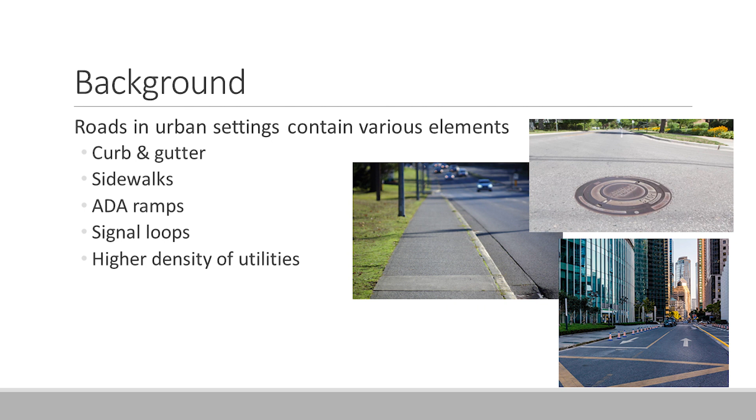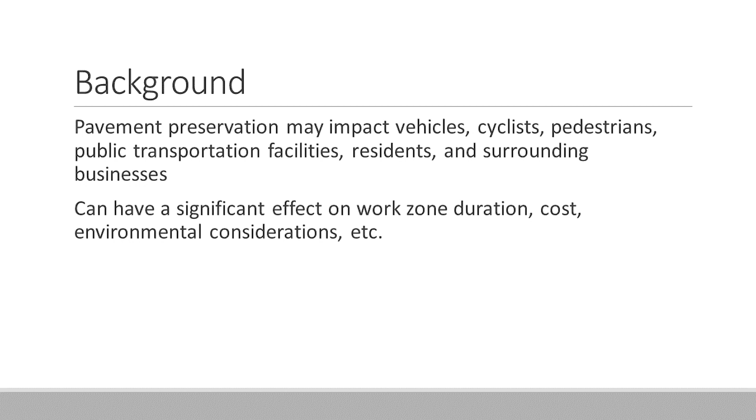These different elements may impact not only the vehicles driving on that road, but also cyclists or pedestrians. We could have public transportation facilities, residents, businesses—all of those could have a significant effect on how long it takes to complete the project, the cost, and environmental considerations.

So the objective of this project was to consolidate and document the latest information on pavement preservation in an urban environment for both rigid and flexible pavements.

We're doing this right now, as Jason said, it's ongoing, but we're achieving it through literature and practice review, identifying factors and their impact level, doing case studies, and compiling all the documents that go along with this project, and also developing webinars on the subject.

The treatments we're considering under this include chip seals, slurry treatments—so slurry seals, microsurfacing, cape seals—crack sealing and filling, thin asphalt overlays, recycle-based techniques as well, and also for rigid pavements, patching, diamond grinding, that sort of thing.

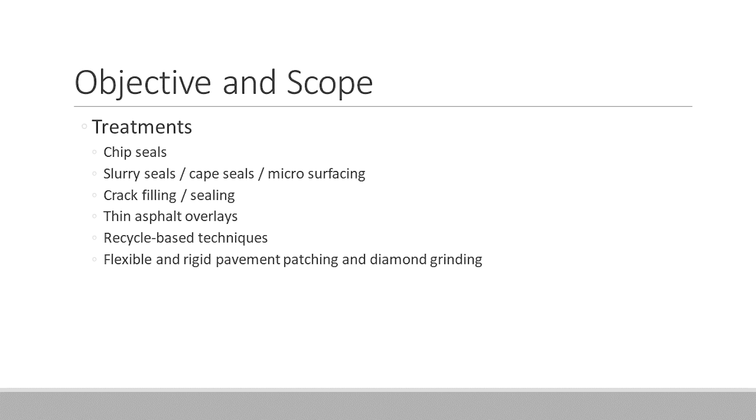Our research team is being led by ARA, Applied Research Associates. Sri Rao is the project manager. We have Letha as the technical editor, and Lisa is taking care of us being 508 compliant with the deliverables. On the NCAT side, I'm the PI, and we also have Travis Wolbeck as a subject matter expert.

We also have the Transtech group. Kiran Mohan-Rush is another subject matter expert, and we also have California State University at Chico, with Ding also participating as an expert there. So the nice thing is we have a team that is active throughout the country, from coast to coast, basically.

So each of us can reach out to different people within our areas and get better information with this.

Starting with the literature and practice review, as expected, a lot of this information is not published. There may be a quick reference here and there in some report, but something specifically for urban environments is really very limited in the type of information we could find.

So we're relying heavily on interactions with owner agencies, with contractors, practitioners—basically talking to people and seeing what their experiences are. We've been reaching out to different stakeholders, talking to different members of the pavement preservation partnerships.

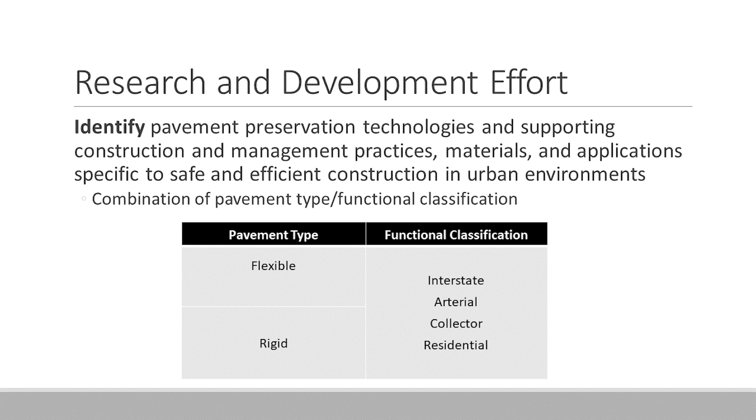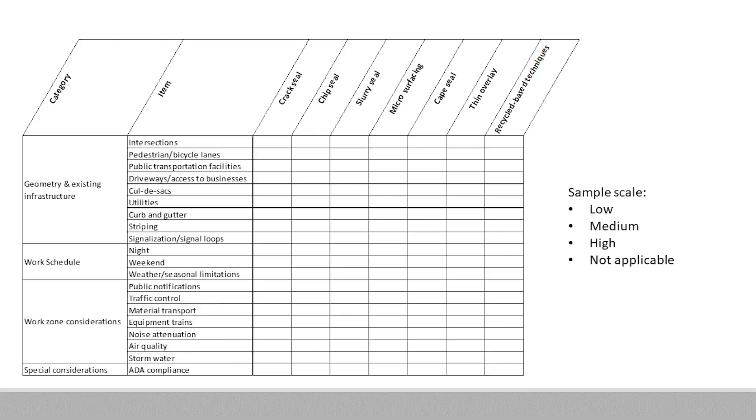Our goal is to have a table like this, with the different items or potential issues, and all the treatments for a given surface type and functional classification. We can color-code it or put a scale for whether the impact of a specific issue is low or high, or doesn't apply at all. That's a quick reference for anyone who wants to look into it. Later in the document, you can see why it's classified that way, and what can be done to minimize or mitigate that.

We're also doing case studies—the field visits could be the case study, but we're proposing 6 of those, so we'll need additional projects that have already been completed. We expect significant overlap in some of the things we want to see. We want to include at least a project with rigid pavement, one in an urban major highway or interstate, one with a complete streets environment, and it could be that one project covers multiple of these. We want to touch on the different regions of the pavement preservation partnerships and different climate zones, and one project with removal and application of pavement marking. It could be that one case study touches on several of these.

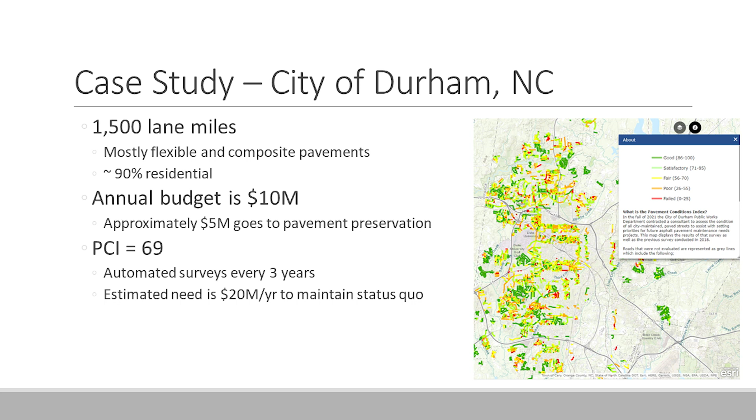To give you a preview of what we saw during our visit to Durham: that city has approximately 1,500 lane miles, mostly flexible and composite pavements, and it's heavily residential, about 90%. Their annual budget is $10 million, and half of that goes to pavement preservation. Their PCI is 69, and they do automated surveys every 3 years. Even with that money, it's only half of what they'd need to keep the current state of their roadways, so they have to be very strategic and smart about what they do.

The treatments they use include crack seal, rejuvenator seals, microsurfacing, and cape seals. They're looking to do their first hot-in-place recycling project but haven't done it yet. They're open to innovations but want to take it slow and make sure they're successful, so they don't end up with something that doesn't work well and gets banned forever.

Some of the interesting policies that they have: they do use crack seal, but they don't leave it exposed. They always do it in combination with other treatments, purely for aesthetics. So they always do crack seal, but cover it with something else.

They work on entire neighborhoods at a time, and I think that's to avoid conflict. So nobody's going to say my street got something and the other street got something different, or my street didn't get a treatment and the next street did. So even if the pavement management system doesn't call for the same thing on the same year, they bundle it all, which I think is smart and cost-effective.

They said before they set up their organization the way it is now, they would just go with what the system said. So it could be that one street needs a micro-surface treatment and the next one a thin overlay, and they would just do it that way—and then they'd never hear the end of it from all the residents.

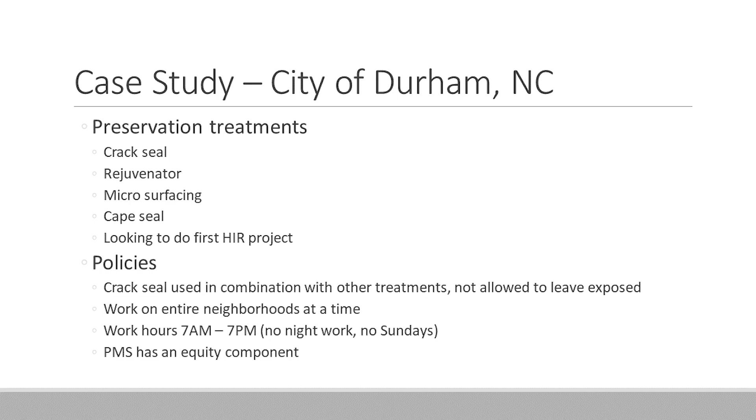Their work hours are 7 to 7. They don't do night work, and they don't do Sundays. Another interesting thing is that their pavement management system has an equity component to it, which I thought was interesting.

They do a very good job with public notifications, which is crucial for the success of their program. The city and the contractor work together to inform users of all the work being done. Because they're so residential, they have to communicate a lot with the HOA.

They start holding meetings with the HOA weeks in advance. They send out notifications by mail and door hangers, and they have a web page. They put the link on the communications they send out, so you can visit and see live what is being done at a certain time. They educate the public and elected officials—they really do a good job with their public outreach.

When we were there, we got to see some of the microsurfacing work being done. Because it's so residential, there were many cul-de-sacs on the streets, which means a lot of handwork has to be done, and that could complicate things a bit or give you a slower production rate.

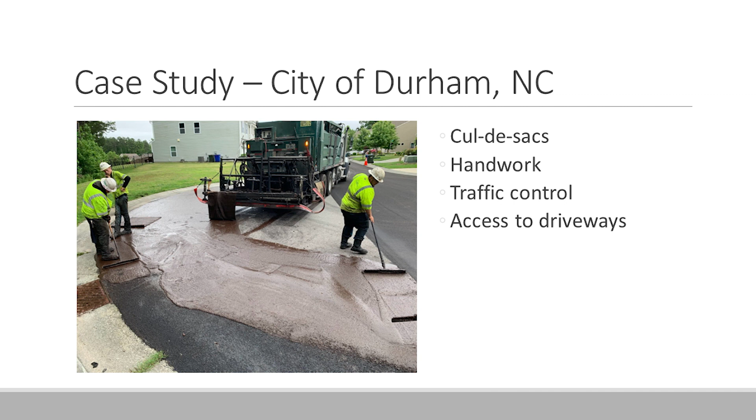Traffic control is also complicated when they're working on these neighborhoods with multiple streets being done at the same time, so they just put up cones and move on—you can't have a flagger on every street. We'll see that in a few slides. Just giving access to driveways and things like that could be a little more complicated.

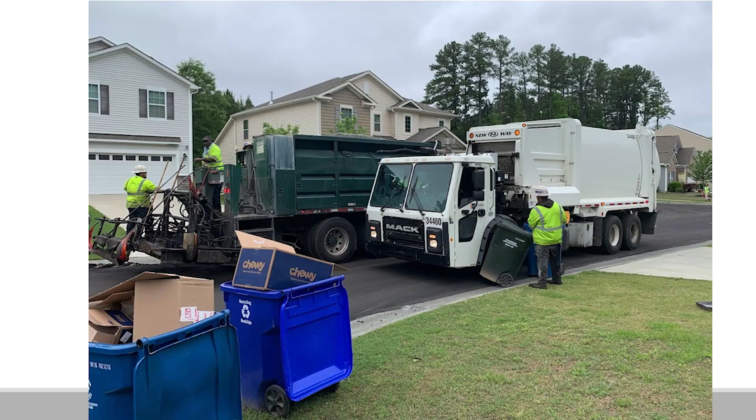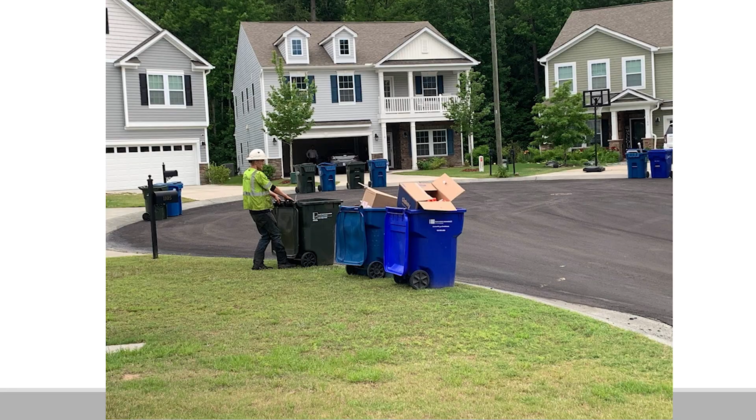Of course, the day we visited it had rained, so they had to postpone. We went to the job site the next day, and it turned out to be garbage pickup day. So a lot of things were happening at the same time, everybody trying to stay out of everybody else's way. I'm sure that was a nightmare for the contractor, but it couldn't have worked better for us—we could actually see all these types of challenges happening.

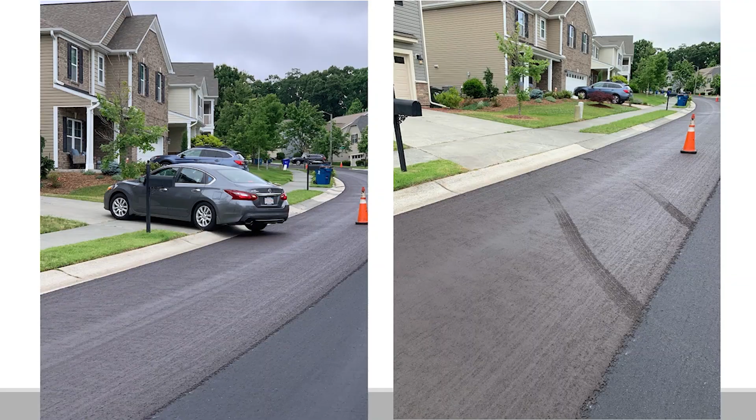You can see the trucks trying to go past one another, the crew members getting the trash cans out of the way—it was wild. Even with all the notifications, there's always somebody who has to go over the freshly placed treatment, and it just kind of hurts my heart to see that. But it just happens. I think being effective with communication at least minimizes these occurrences, but I don't think you can necessarily avoid them entirely.

After we do visits like this, and we have a few more to complete along with the case studies, we're putting together a document—a handbook for planning and constructing pavement preservation projects in urban environments.

For each of the items, we'll explain why it is a challenge and give some thoughts on it, since Federal Highway doesn't like the word 'recommendation.' We'll also have appendices with the tables I showed you, and even an FAQ section at the end.

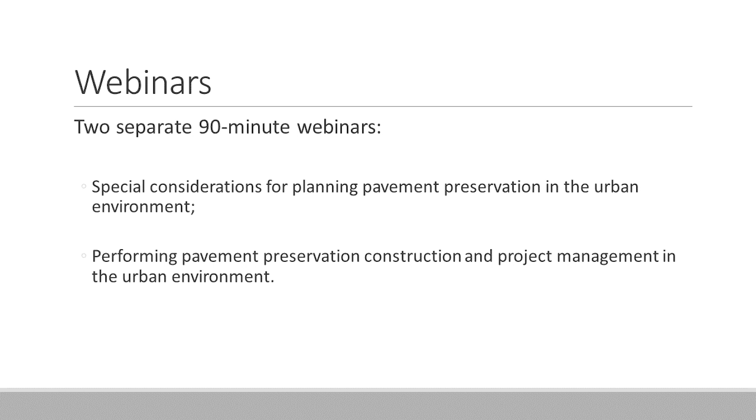We're also developing content for two webinars: one on considerations in the planning stage for projects like these, and the other more on construction and project management. We'll develop the content and line up the speakers. For deliverables, we'll have the final report as well as a tech brief outlining the key points.

For final thoughts, our perception right now is that pavement preservation can be done successfully in an urban environment. It could be more challenging depending on different elements, but that shouldn't keep people from doing preservation in an urban setting.

Communication seems to be essential, so that's the most important thing. One of the variables that seemed to affect how an item impacted execution of the project was traffic level and functional classification. It's not the same to do it on a busy roadway as on a subdivision, for example.

The project is still underway. If you have burning thoughts or questions, anything you feel you need to share, please feel free to contact us. And with that, that's all I have.